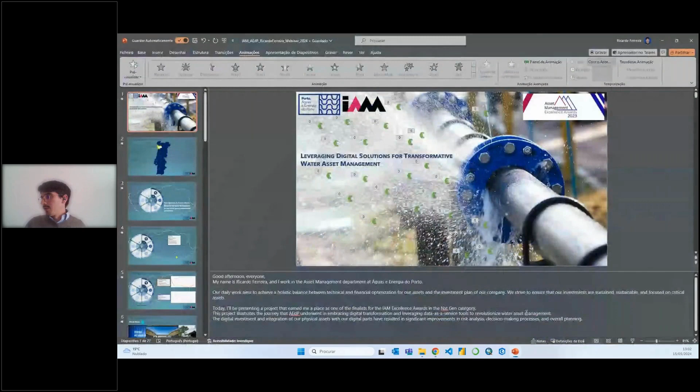So, good afternoon, everyone. I work in the asset management department at Águas e Energia do Porto, and our daily work aims to achieve a holistic balance between technical and financial optimization for our assets and the investment plan of our company. We strive to ensure that our investments are sustainable, and focused on critical assets.

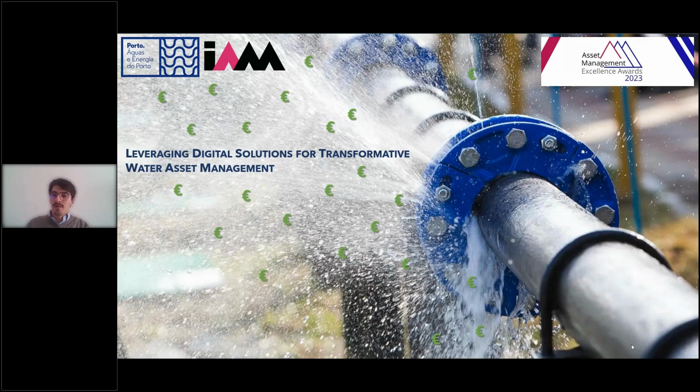This project illustrates the journey that ADP underwent in embracing digital transformation and leveraging data as a service tools to revolutionize water asset management. The digital investment and integration of our physical assets with our digital parts have resulted in significant improvements in risk analysis, decision-making process, and overall planning.

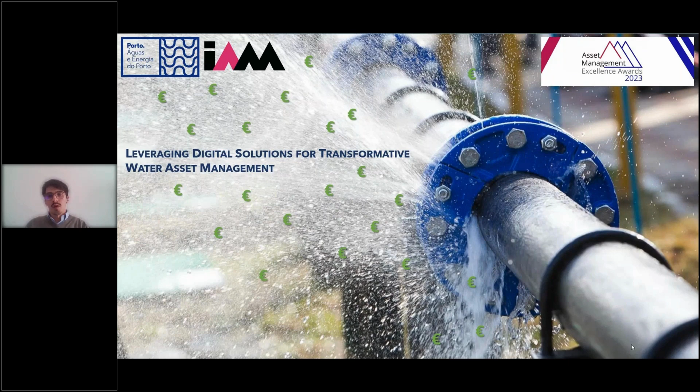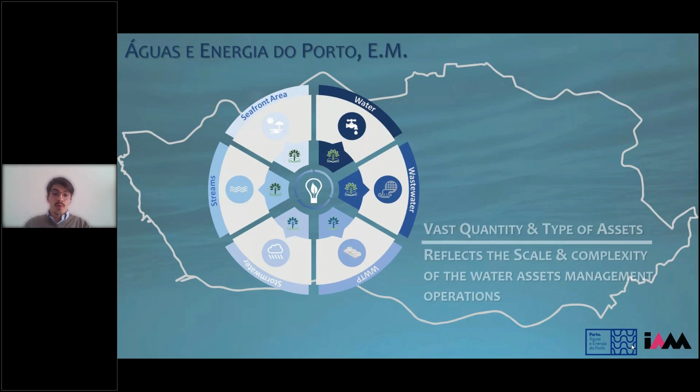With such a broad scope, you can imagine the sheer volume and diversity of assets we handle, from numerous infrastructures to a vast array of scales, complexities, and types, whether linear or nonlinear, underground or visible, known or unknown. Our operations cover a wide spectrum. Efficient asset management in such a context is far from straightforward.

Our water supply system comprises about 800 kilometers of network, including 6 water tanks, 93 DMAs, serving over 163,000 customers, and featuring more than 350 monitoring points strategically distributed throughout the system.

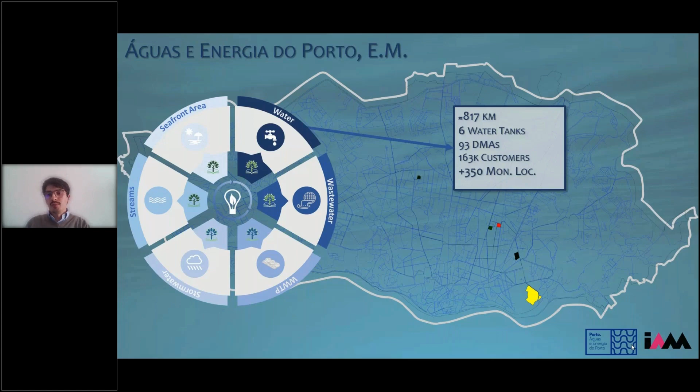Regarding our drainage systems, we do have two distinct ones, one for wastewater and another for stormwater. It's worth noting that our city is famous for its ancient underground water galleries, adding a unique dimension to our asset management.

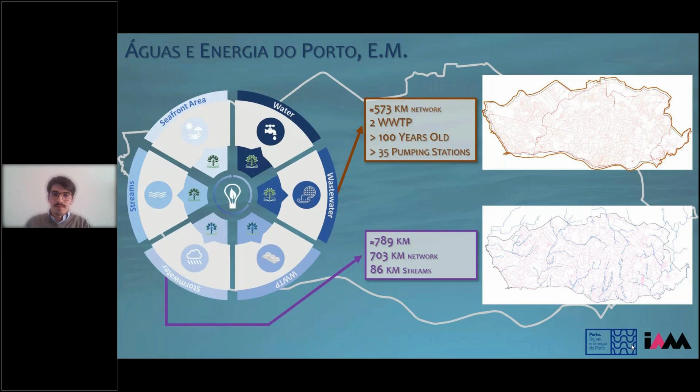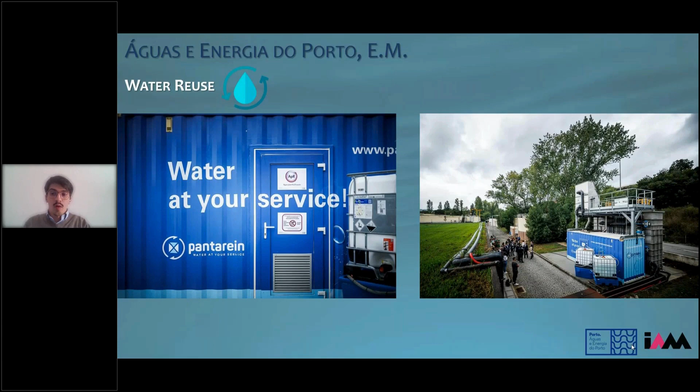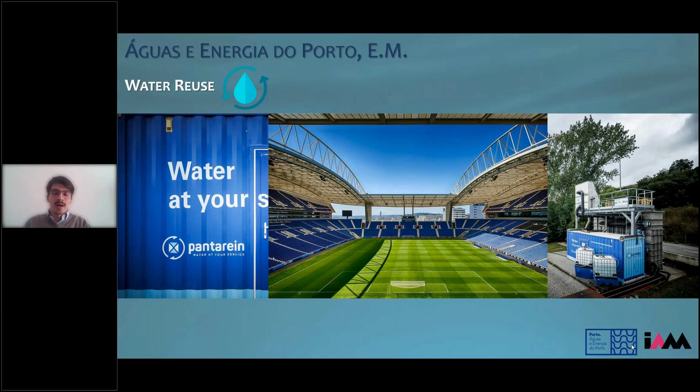We're proud to say that we take sustainability seriously by reusing our wastewater. Through cutting-edge technology, we convert it into water that's not only suitable for cleaning the city, but also for watering the lawns of our city's football club. It's a testament to our commitment to maximizing resources and minimizing waste. And since 2020, we have taken on the execution of the municipal energy strategy as well.

Before we jump into the specifics of our work and the outcomes we achieved, I want to take a moment to shed some light on the global reality of the water industry. It's crucial to grasp the difficulties of analyzing and assessing risks in a system that's constantly evolving and is dynamic.

Water assets differ notably from traditional infrastructure assets. They represent one of the most valuable and scarce resources on the planet. However, the responsibility of carrying this resource can also pose significant challenges when systems aren't equipped to handle the right amount. So, how can we better control and understand the variables for each specific and independent system? How can we direct the most efficient investment to each ramification of our water cycle assets universe? The answer is by allowing the digital to bring its contribution.

Focusing on digital maturity, ADP has reached a stable level, dedicating substantial time to boosting productivity, which has allowed us to progress and delve deeper into analysis and fully leverage our digitalization initiatives. Today, our operational staff works with digital environments on site. We offer various digital platforms for customer support, and we have implemented predictive models.

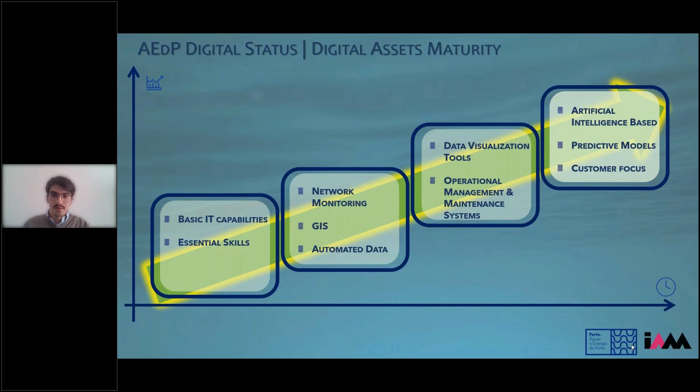Now, the presentation of the project will spotlight a crucial aspect of Porto's water supply master plan, focusing on detailed data analysis to extract invaluable insights. Our process involved the examination of a large volume of data with diverse types, focusing on accuracy, timeliness, and the selection of data with substantial real-world value. We're talking about millions and hundreds of millions of data points distributed throughout the information systems that the company possesses.

Although AEdP have a satisfactory digital maturity, at the project's initiation, all data was exported from the different information systems and stored in Excel spreadsheets. This is a widely recognized data analysis software that everyone can easily work around.

However, due to the involvement of multiple personnel, data stores, and a variety of file sizes, the primary spreadsheet began to falter, placing all the previous work in a critical situation and creating a delay on the project deadlines. Also, because information and analysis types were dispersed across multiple files, the outputs were inconsistent and insufficient due to a lack of connection between them.

So this led us to develop a strong data model capable of handling the extensive data spread across multiple databases storing our primary information. We collected historical leak data dating back to 2013, initially stored in an Access database, and incorporated it into a specific feature class within ArcGIS.

We knew that this was one of the variables to pay more attention to when identifying the critical assets within the water supply system. We had customer data, including water meter IDs, building IDs, and consumption locations that were integrated into the GIS to establish correlations with our water supply network.

We also integrated Porto's digital elevation model data since we knew that the terrain values had a direct impact on our hydraulic expressions and formulas. We gathered operational data from our platform software and included it in our server, alongside data from our flow and pressure sensors within the water supply network.

Once all the data storage were defined, we initiated the logical construction of our data model. Nearly all of our relationships were built around our pipe ID.

While our initial focus was not asset-by-asset control, we aimed to construct a model capable of delivering asset detail as we moved forward. So we were preparing ourselves to have the conditions to, from now on, have asset-by-asset control without creating a model specific to each asset. Don't forget that we have a panorama of our entire water supply system as one asset instead of multiple assets.

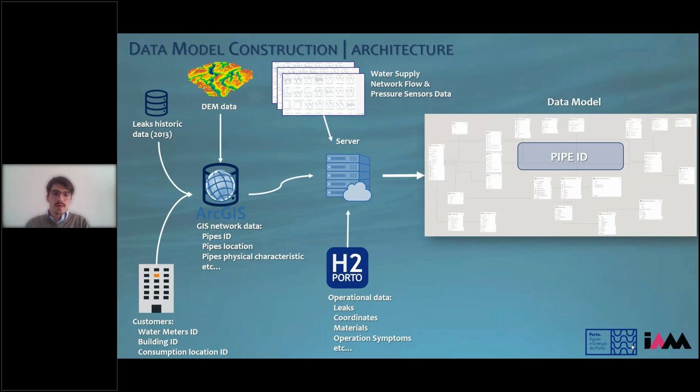So how could we optimize the limits of the existing DMAs? How to analyze the minimum impacts and costs on the network? How could we actually control the pressure and reduce the number of leaks to improve customer pressure levels?

We began by creating a model and developing an algorithm to simulate our ideal water distribution system, ensuring optimal pressure citywide. It also outlined the potential for improving and extending our DMAs to address problematic sensitive zones.

This model and algorithm was based on existing water tank locations, the network location with information coming from our GIS models, and the terrain levels from the DEM.

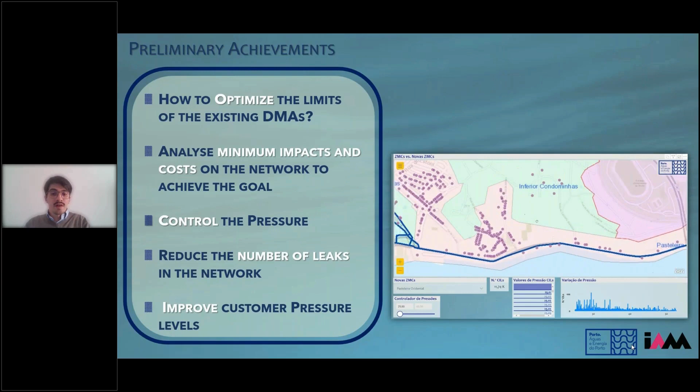We then visualized the results DMA by DMA, comparing them to the current system on the ground. Initially, the difference made us question the model's accuracy. However, after verifying pressure measurements on site, we confirmed its reliability.

Building on the initial analysis capabilities and the results of our previous model, we embarked on structuring a tool designed to provide ground and floor level pressures for each customer. We are talking about 163,000 customers distributed in a very dense city like Porto.

So this aimed to determine day and night pressure per customer, identifying the ideal pressure level, and determine the proximity of each customer ID to that ideal level. We're talking about 26-meter water columns.

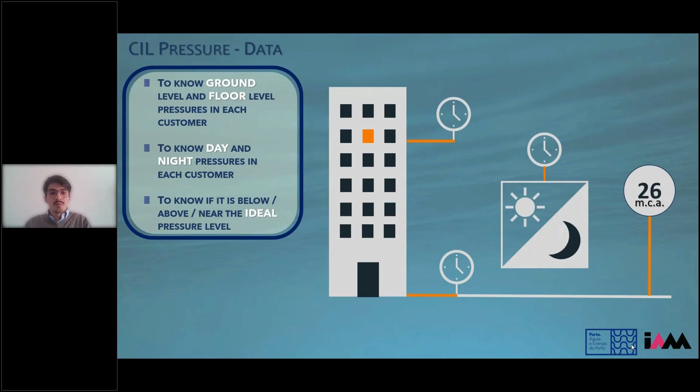Here we can see the CIL pressure tool. This tool enables DMA by DMA analysis, offering control over the pressure being examined, while spotting problematic areas with both maximum and minimum pressures. It further provides insights into the number of affected pipes with their respective IDs and illustrates the pressure variation across the network through the map.

Also, by having this tool, we were now able to analyze and compare two separate and distinct assets that normally don't go hand in hand, like clients, customers, and water pipe ID, or in this specific case, the entire water supply system. We knew exactly what pipe was responsible for delivering water to the customer and the implication that would have on the pressure levels and the quality of pressure that the customer has.

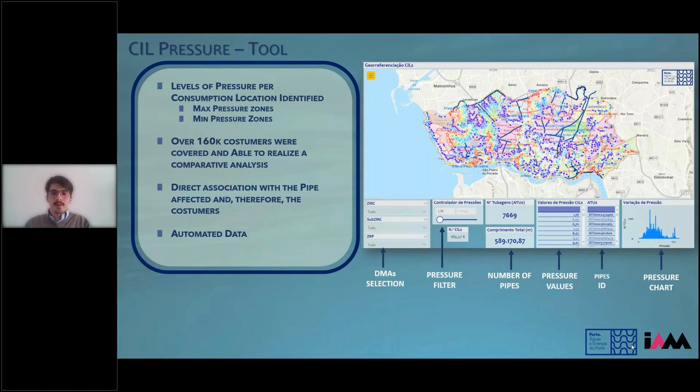Here's an example of the DMA Nova do Tronco, located on the north side of Porto, showcasing the improvement results achieved through the digital model. If you look at the pressure graph, we were able to reduce the pressure by 25 meters at night, and the minimum night flow reduced at once from 7 to 4 cubic meters per hour. These results were enormous for a zone, or DMA, that was actually critical to our water supply system.

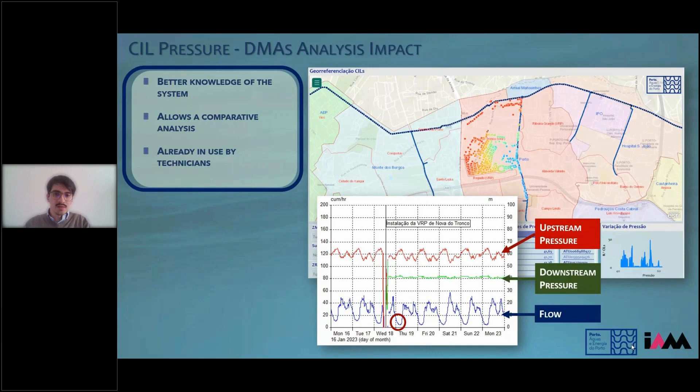Okay, what about leaks? As the project went forward, our attention shifted towards addressing leaks within our system, aiming to boost our asset management intervention plan for the network. Although AEdP already has a platform and operational management software, we recognize a few issues within our operational management software, specifically related to leak interventions, leading us to begin our efforts by analyzing all of the history within the operations regarding the leaks.

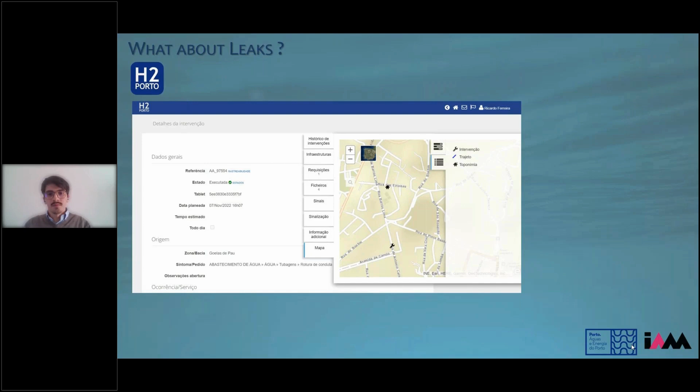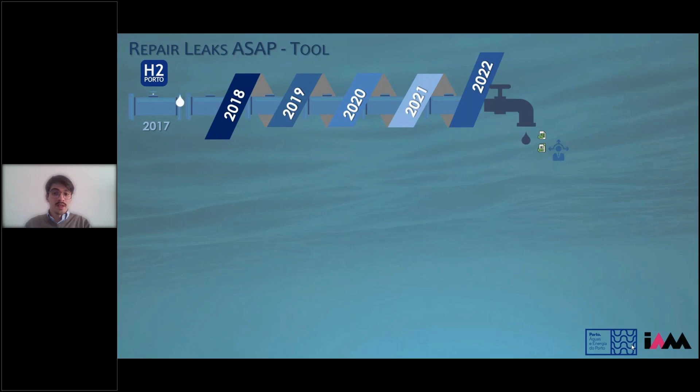Since 2017, ADP has been using a management operation platform to collect data from field operations. However, until 2022, the information regarding leaks was not being used effectively, causing a lack of profitability for decision making. To address this issue, we implemented a new procedure. We continue to use our management operation platform to develop an analysis and data cleansing process. We also joined with the operational team and made them understand the necessity of having quality data collected on site.

Then we georeferenced all the leak information to our GIS ID pipes, and then we structured all this information into a user-friendly application, enabling technicians to extract valuable insights within leaks. The biggest goal of this tool is that it is updated from 2022 onwards to reflect all of the network updates once it is connected with our GIS model and all of the other databases regarding the information between the software platform and the GIS models of the water supply system.

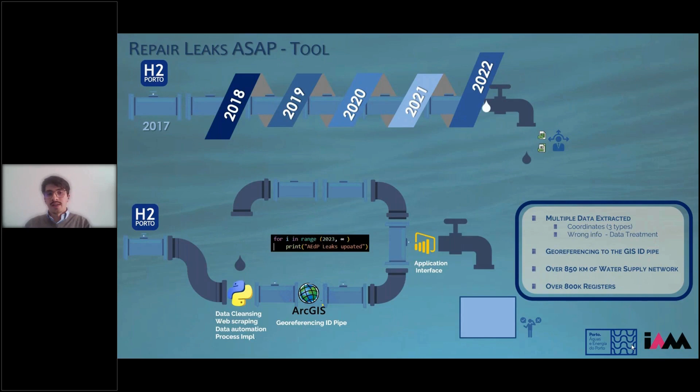Here we can see the preliminary tool concept. Here we have the first version of the algorithms involved in the analysis, serving as the foundation for the final tool and its associated indicators.

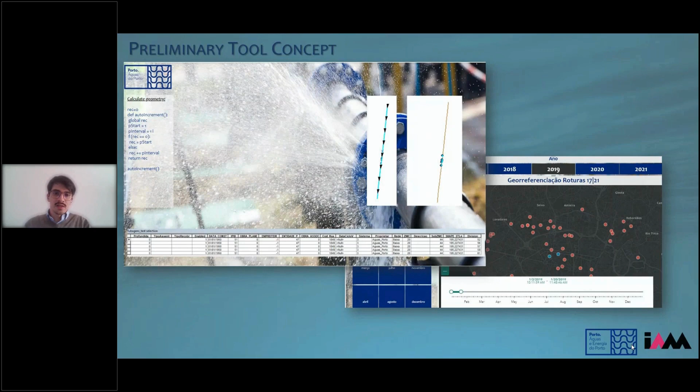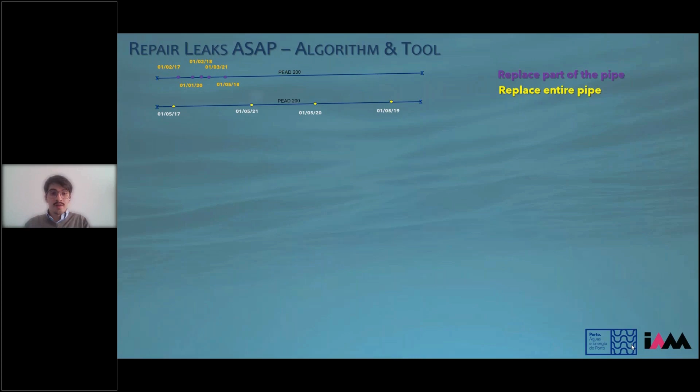The tool incorporates various algorithms that enable us to analyze our network meter by meter, allowing us to identify correlations and conditions of leaks per pipe and assess whether the pipe needs to be entirely or partially replaced. As you can see on the diagram, the algorithm takes the collected time data regarding the operation on site and associates it with the historic data of the analyzed pipe, ID by ID.

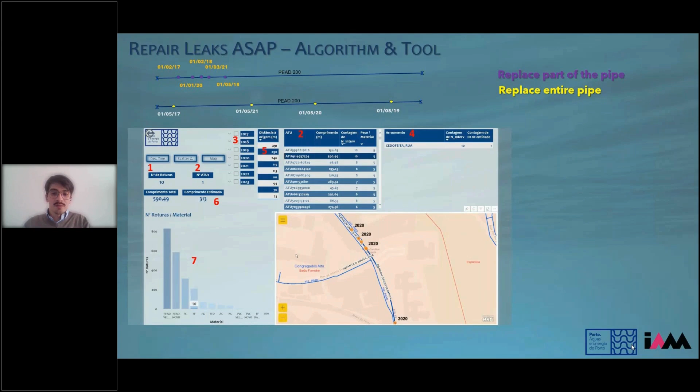In this video, we can see the tool interface, where we can filter the leakage analysis by a specific year. The algorithm delivers the total pipe length that has a history of leaks throughout the pipe length. If we analyze the full leaks history and focus on the second most priority pipe, we can see that the algorithm recommends replacing only a part of its length instead of replacing the total extension of the pipe. It is important to note that the tool does not dictate the technician's analysis, but rather highlights potential issues for them to consider. Here is a brief legend outlining all of the tool's capabilities.

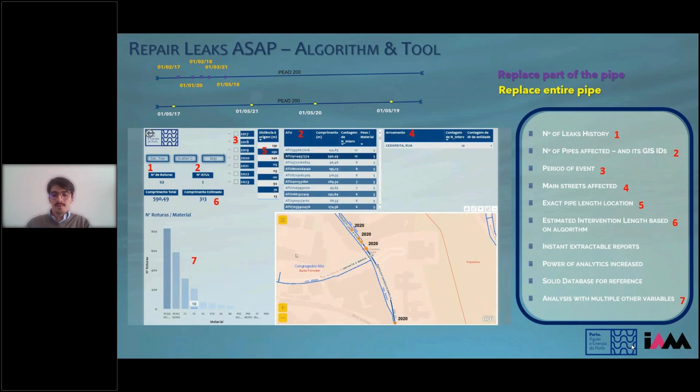The implementation of this tool has enabled ADP to identify its critical water assets and make informed decisions regarding interventions based on the tool's outputs. The first iteration that the tool gave us delivered a total extension of 3 kilometers to resolve all of the problems within the system regarding the leak nests. A leak nest is actually a concentration of leaks in a zone that we assume and correlate as critical, having a lot of events of leaks throughout the history of our system. Based on this, ADP started a fast on-site action plan called the Urgent Water Pipe Renovation Contract.

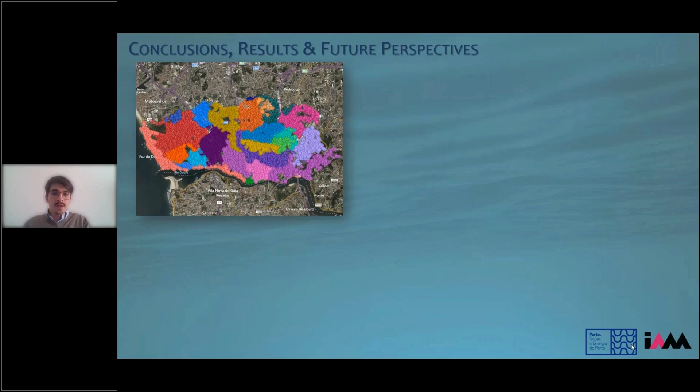As conclusions, results, and future perspectives, we would like to adapt all the DMAs to the ideal pressure level. On the left side, you can see the DMA division at the current moment, and on the right side, you see what the DMA should look like if we could divide the network following the terrain elevation in pressure levels with 20-meter intervals. Because of this digital model, we have a strategy to get there, and we work daily to achieve it, already knowing how much it will cost us and the best way to go about it.

Also, since it reads directly with the updates within our GIS model and therefore our water supply network, it can improve and it can also translate that new information to adapt the algorithm's results.

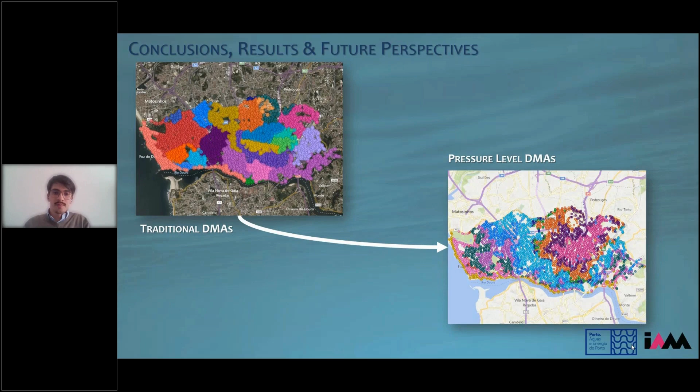And also, this strategy's impact extends beyond assets improvement. We have addition of new data periodically, instant acting time, and we can compare and analyze with historic data and historic events on the system.

Now, as the final conclusion, water asset management involves understanding the dynamic system of water and how it reaches the people who rely on it daily. This project doesn't just focus on traditional infrastructure assets. It considers the entire water supply system as one asset.